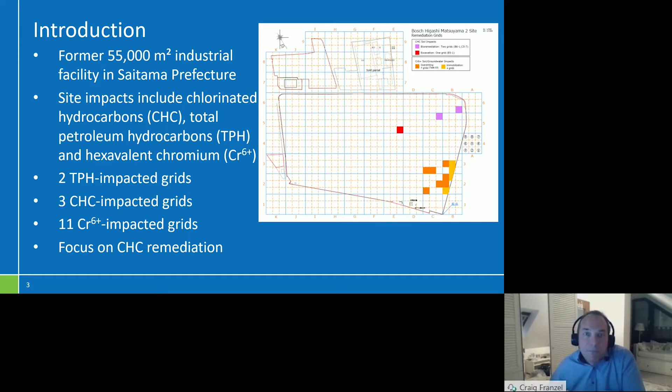So the site geology, it's located on an alluvial fan terrace. There are several interbedded layers of loam, sand, clay, gravel. When I say there's no significant aquitard within the area of interest, I mean in the contaminated source areas. There are two distinct groundwater zones, an upper and a lower aquifer, over most of the site. However, in the source areas, there are several gaps within that aquitard. So it's really one aquifer as far as the contaminated area is concerned. There is a lower aquitard at about 15 meters below ground surface.

Hydraulic conductivity, 10 to the minus 3 centimeters per second, so relatively good hydraulic conductivity. Groundwater flow west to east. So when you see this map, this shows a portion of the site in the upper right corner. These were the main source areas of chlorinated hydrocarbon impact, in 3 grids; they're 100 square meter grids. According to Japanese requirements, contaminated sites or potential contaminated sites need to be investigated and delineated in a grid formation.

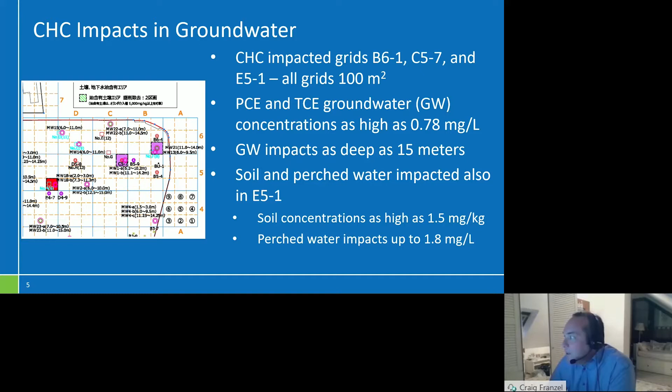Soil concentrations were as high as 1.5 milligrams per kilogram. Japanese law requires that this be noted as milligrams per kilogram and milligrams per liter rather than micrograms per liter. So maybe the units are a bit deceiving in that you may be used to looking at that in micrograms per liter.

The remediation program, according to Japanese law, there's the Soil Contamination Countermeasures Law, the SCCL, and that is a remedial approach which is somewhat similar to the United States in that it allows you to develop alternative remedial options for the site. However, these all need to be developed in coordination with the regulatory authorities, and they have to be certified by the regulators before you may begin remediation.

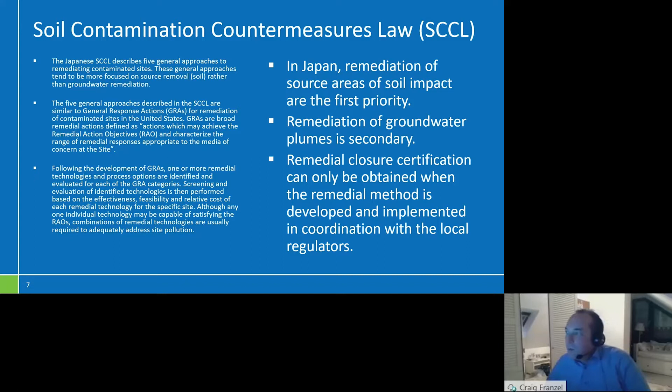So the focus in Japan is really on removal of source areas, and under the Japanese philosophy, once the entire site has been investigated and the groundwater contamination source areas are known, the groundwater plume is secondary. So the focus is really on soil remediation. So in order to do that, the Japanese requirements within the source areas require that soil for PCE and TCE be remediated to 0.01 milligrams per liter; excuse me, that probably should be milligrams per kilogram.

So groundwater is milligrams per liter, and vinyl chloride, the standard is incredibly low. 2 micrograms per liter is the target, and that's the target which we had to achieve following the source area remediation, and we were able to do that, and we're now within the 2-year monitoring program for the site.

So the initial approach was excavation of soil impacts, followed by in situ treatment using a carbon amendment from a corporation called EcoCycle. Super EDC was the product that we used as a carbon amendment. And following that, we also performed injections using zero valent iron.

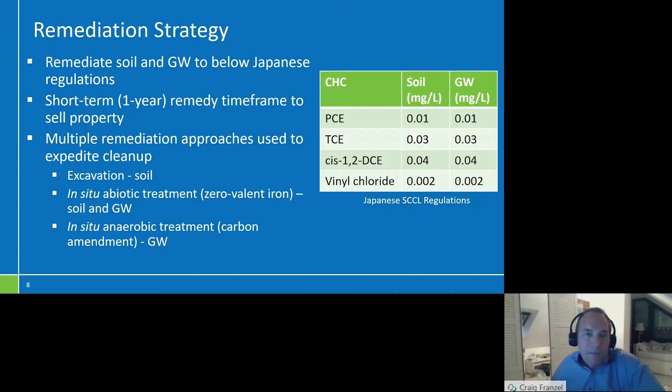So the first step of the remediation was soil excavation in one of the grids, and this grid was impacted by chlorinated hydrocarbons up to 1.5 milligrams per kilogram. And so that was excavated to a depth of about 4.5 meters. And we backfilled the excavation pit using zero valent iron mixed with backfill to treat the perched groundwater that was present at the site. And that was the extent of the soil remediation.

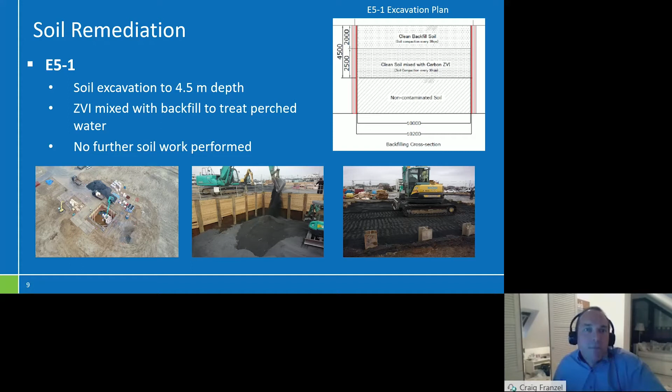Groundwater remediation was a bit more tricky. We performed in situ bioremediation using the product I just mentioned, the EcoCycle product. So Super EDC is the brand name, and we used this carbon amendment to encourage bacterial anaerobic biodegradation of the impacted grids, and there were multiple injections performed. I don't have the exact number in my head because we are still in the monitoring phase. We have not yet written the remediation report so far.

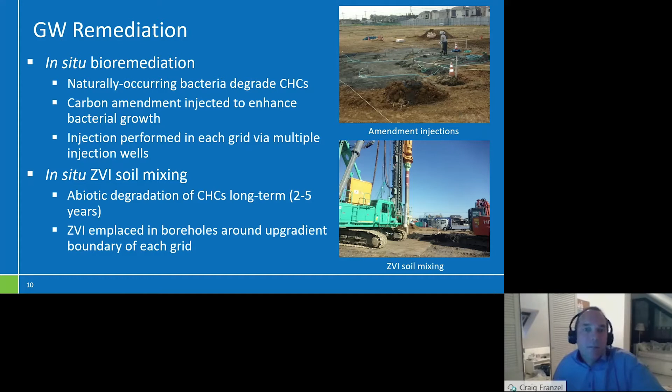So following that, we also performed some soil mixing using zero valent iron in the upgradient boundary of each grid and within the boreholes themselves within the grids.

So groundwater performance monitoring was required immediately following the completion of the injections, and the parameters required were total organic carbon, oxidation reduction potential, pH, ferrous iron, chlorinated hydrocarbons, and ethene. And following this performance monitoring, we were able to determine that some additional injections were required.

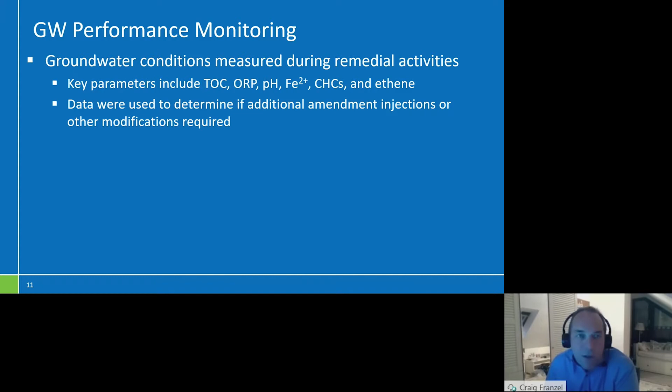So this is kind of an overview. During the remedial activities, Japan is often impacted by typhoons, which cause the groundwater levels to fluctuate widely, and with an aquifer that's as transmissive as this one is, we were negatively affected by these water fluctuations. Following the injection work, we performed some post-injection soil sampling, and we determined that with the water fluctuation, some of the shallower soils had been recontaminated by chlorinated hydrocarbons from lower depths, due to the infiltration, for lack of a better word, from the elevated groundwater levels.

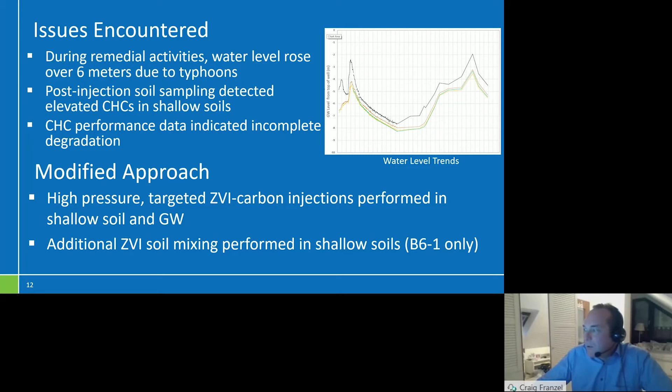And so we had to take a modified approach to our remediation, rather than only using the Super EDC product, using vitamins and carbon substrate to stimulate the anaerobic bacteria. We also developed an approach to inject high pressure carbon zero valent iron, to inject zero valent iron into the shallow soils and into the groundwater. And we also performed some additional ZVI soil mixing in one of the grids to ensure that anaerobic degradation was able to continue. And this was done using a forced injection approach, using double packer injections.

You can see the timeline here. The first well installations and site investigations were completed in December of 2017. We installed the first wells for remediation in the remediation grids in 2018. And the first injections were performed in 2018, and then we followed that up with the performance monitoring and some additional source investigations, as the areas had been recontaminated from the high water table fluctuations.

So the double packer injection work had been performed in August 2018, followed by some additional soil mixing, and we created a zero valent iron barrier at the grid, so that further cross-contamination from up-gradient off-site sources did not occur. This was the issue at the grid in the upper right corner from the map that I showed you previously. And with a plume of CHC entering the Bosch site from an off-site up-gradient source, it was necessary to secure the source area of impact on site, so that we could ensure remediation had been completed to the satisfaction of the regulators, so that a remedial closure letter could be granted.

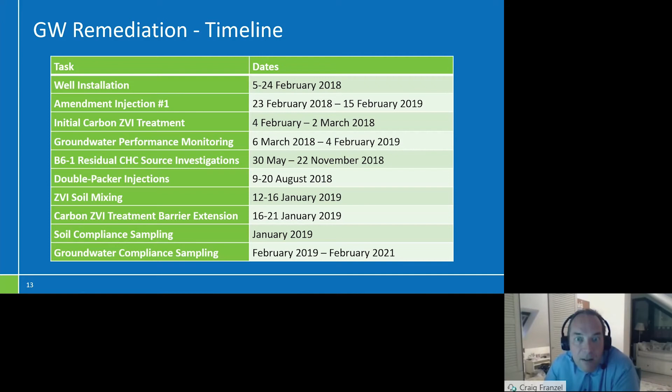The final remediation work was completed in January of 2019, followed by some compliance sampling, and now we are in the groundwater monitoring phase of the program. According to Japanese standards, this must be completed for a 2-year period, and that will be concluded in February 2021.

So when we talk about performance monitoring, you can see when we first performed the first injections, the concentrations of PCE and trichloroethylene degraded to cis-DCE, as you would expect, and to vinyl chloride after the first injection. You can see the spikes in vinyl chloride here following the first injection. And so supplemental injections degraded the vinyl chloride. However, the typical monitoring value of ethene was not detected in any of the monitoring rounds following the degradation of the vinyl chloride, so that was a bit unusual.

However, following the high pressure ZVI injections using the dual packer, we were able to detect some ethene following that. So since February of 2019, we have been able to observe all concentrations are below the Japanese standards in all three grids.

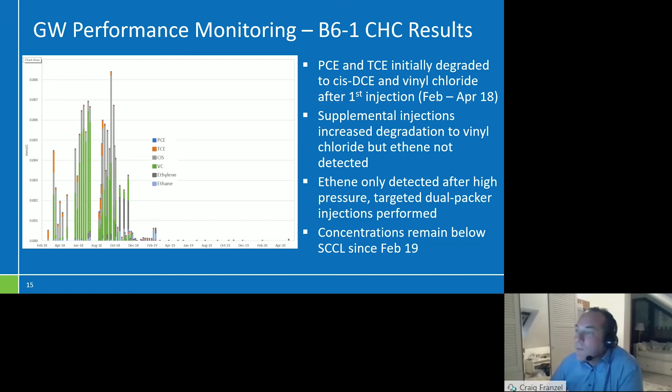So if you look at the trends from two different grids, here's two of the contaminated grids, C57 and E51, and we have similar results in B61. You can see that degradation has occurred, and all of these standards have been met. We were not able to do that, of course, until we modified our treatment program from the super EDC to using zero-valent iron injections.

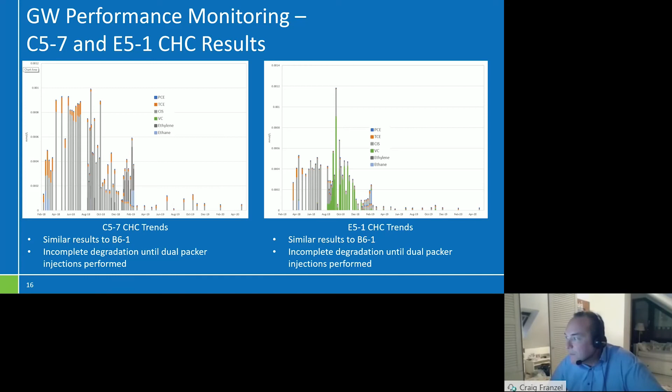So in summary, the initial results showed that we had degradation, but it wasn't enough to meet the requirements from the regulatory authorities, and we were not able to achieve this during additional injections. However, we found the approach using the zero-valent iron amendment injections in targeted areas following additional delineation of this impact was very effective. And in this circumstance, zero-valent iron seemed to be the game changer for remediation of chlorinated hydrocarbons at this site.

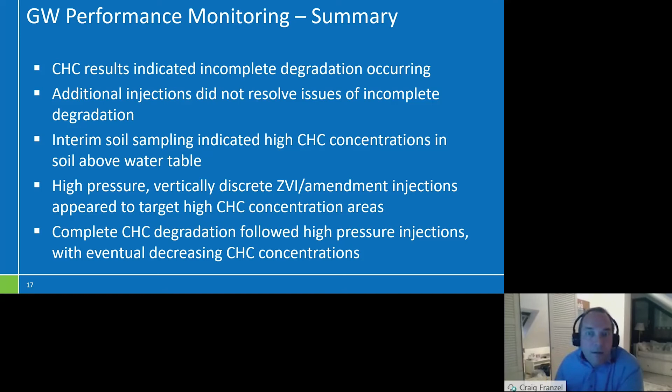So post-remediation monitoring results. You can see all of our concentrations are below the required thresholds. The most risky parameter, really, is vinyl chloride, as the regulatory standard is 2 micrograms per liter. It is very, very difficult in any circumstance to meet that objective. However, we've been very successful in this situation.

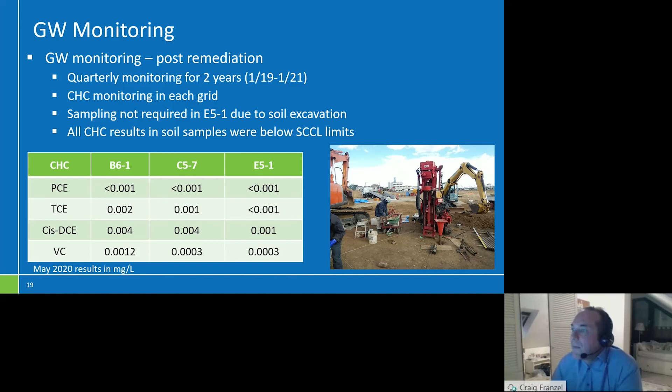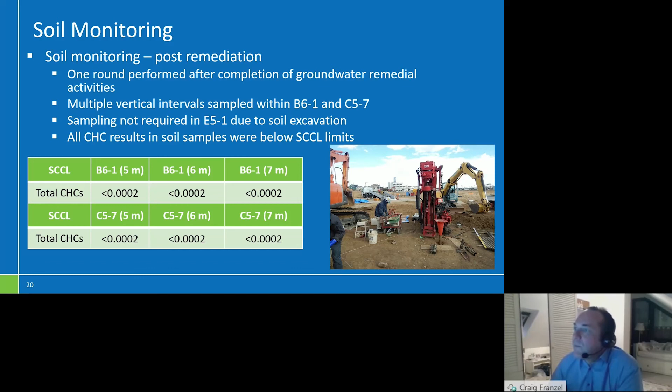So following the initial remediation, we also performed some soil monitoring. This is no longer required. We're now only in the groundwater monitoring phase, but the initial soil monitoring results were also below the Japanese standards. So in summary, we needed a very short-term remedial approach. We had less than 1 year to complete the remediation, followed by 2 years of monitoring.

The remediation was needed in a hurry as our client Bosch wanted to sell this property and had an interested buyer, but the buyer was looking for a highly discounted price for the property, and as you can imagine, this property is in the greater Tokyo area, so real estate values are at a premium.

Bosch was determined to remediate this property on their own, and since CDM Smith has been a long-term consultant to Bosch here in Germany and in other places of the world, who I see Mr. Ebert is now joining the conference. Mr. Ebert is the client manager for Bosch worldwide for CDM Smith, and Bosch put their trust in us, and we were able to perform this work within a year using a combined team, which was based in Germany, being myself and Mr. Ebert, as well as our technical division remediation manager, Mike Lamar from CDM Smith in Denver.